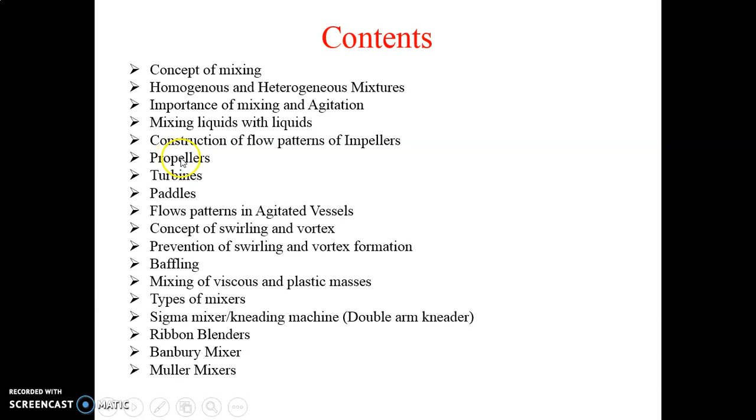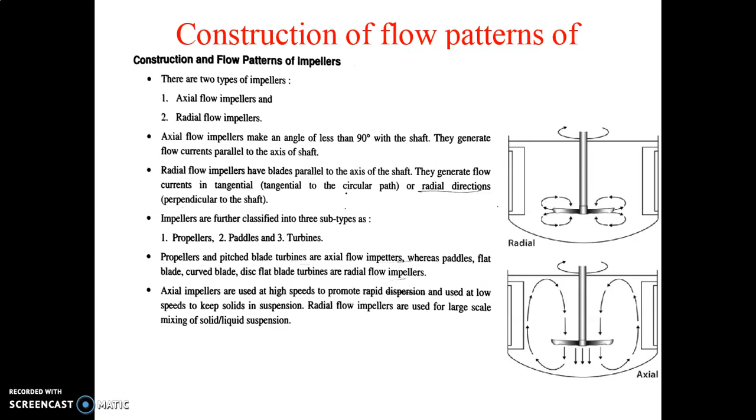That means you don't have to insert the propeller at the center of the tank because there is a vortex formation. That part I will discuss in the next slides.

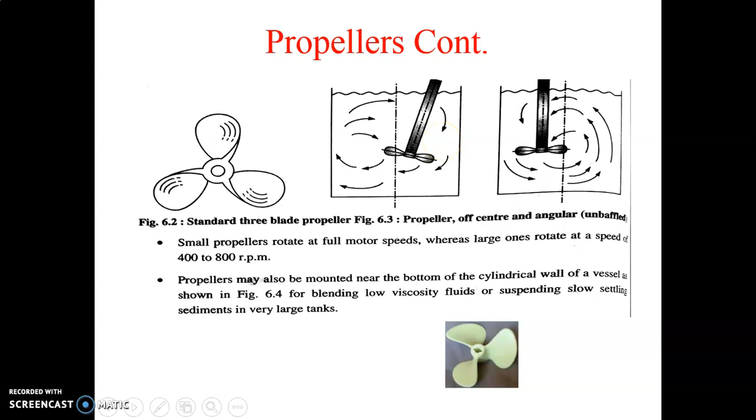So here the propeller may be inserted in the tank from the side, so this is side entering propeller. Instead of off center, we can insert the propeller from any side of the vessel.

And this figure shows the flow pattern of the propeller. The propeller drives the liquid straight down. This liquid is driven down to the bottom of the vessel, and at the bottom of the vessel this liquid stream spreads radially, that means along the radius in all directions, like this.

Then the liquid flows upward to the wall, like this, and finally it returns to the suction of the impeller, this point. So in this way the flow pattern is generated: first the liquid is driven at the bottom of the vessel, then it spreads radially along the wall, and then finally it returns to the suction of the impeller.

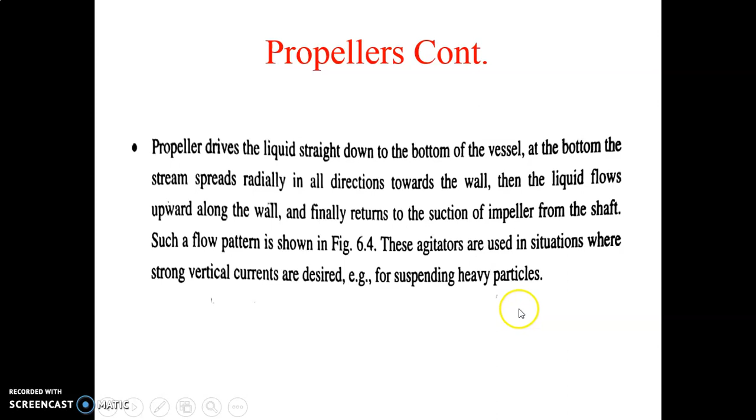So in this way the flow pattern is developed when we are using the propeller in any vessel. This type of agitator, called the propeller, is used for suspending heavy particles. That means if you are mixing a solid material in a liquid, at that time you can use this type of impeller. Next one is the turbine impellers.

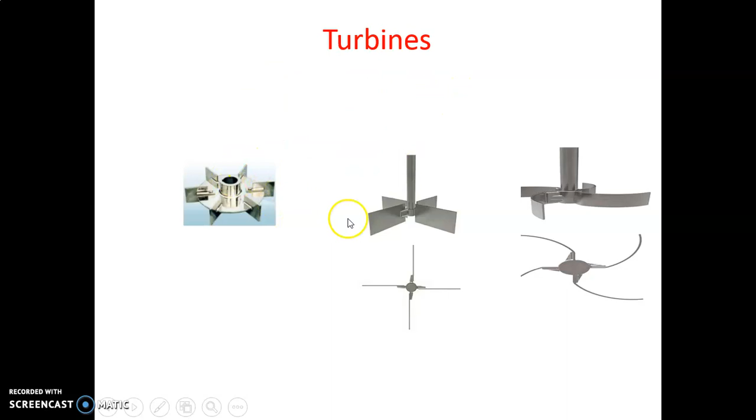Shrouded means there is a cover, this cover is provided along the blade of the impeller. So this is called shrouded. These are the actual photos of some of the turbines.

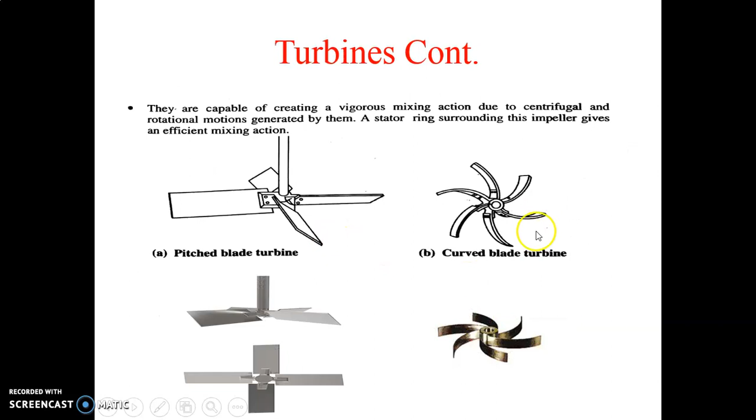And the curve blade, that means the blade which is having curves like this, these types of blades have an angle of 30 to 60 degrees. The speed of these impellers is 50 to 250 revolution per minute. Turbines are used for different liquids having viscosities up to 10 to the power 4 centipoise. Centipoise is nothing but the unit of viscosity.

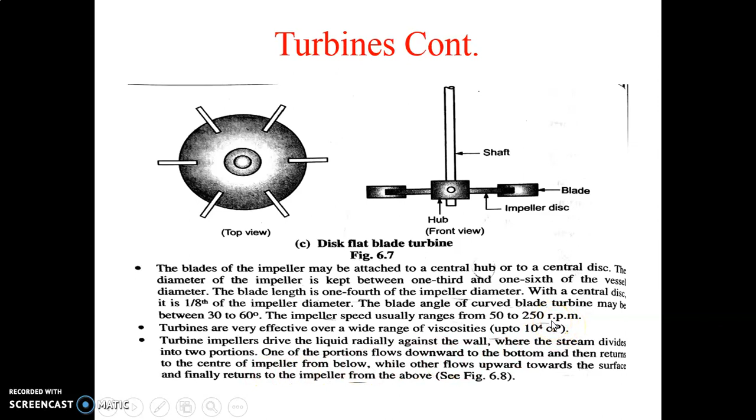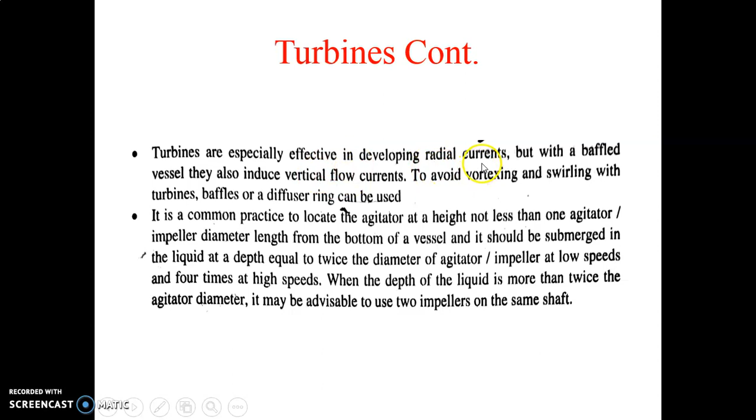So this is the flow pattern developed in an agitator. Generally, turbines develop the radial current. Radial means along the radius.

Next agitator is known as the paddle. Paddles have 2 or 4 flat blades instead of curved ones. There are flat blades, and generally these paddles are vertical, meaning in this direction. I will show the figure, and it is extended close to the vessel wall.

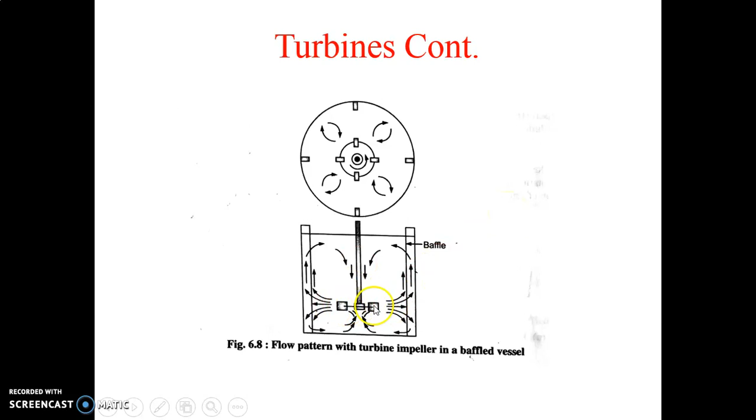These turbines have small diameter, but in case of paddles, the diameter extends up to the wall. They run at a speed of 20 to 150 rpm, and the total length of these impellers is 50 to 80% of the inside diameter of the vessel. The circulation of the paddles is poor, meaning circulation is not sufficient.

There are different types, one sometimes called anchor. If we look at this figure, this is called an anchor. This is a flat paddle, gate, and this is the combination of anchor and gate.

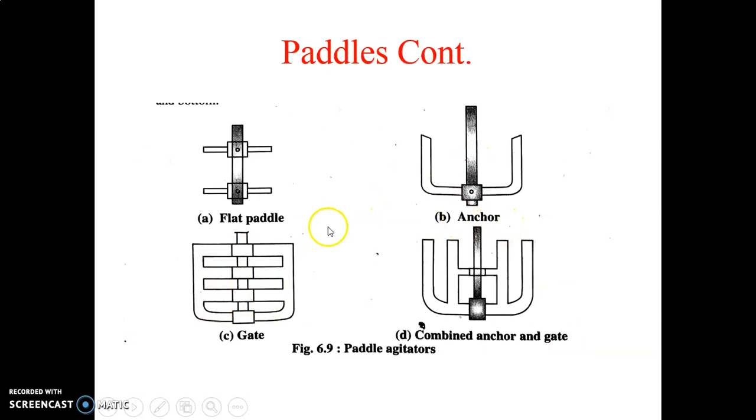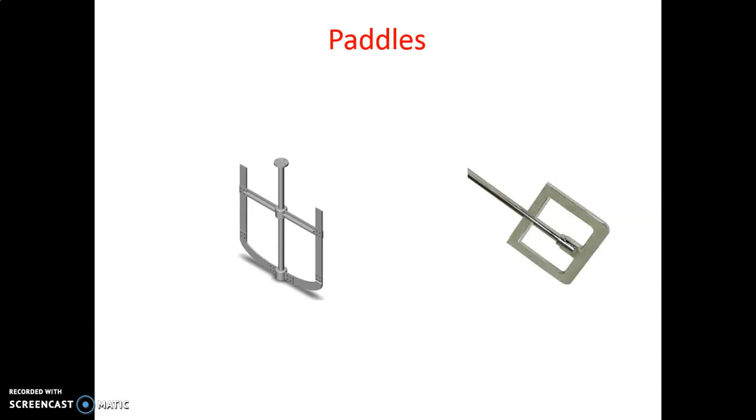So this is nothing but the paddle. If we look at the actual photograph of the paddles, it will look like this - this is an example of a gate. This type of agitator is used just for mixing components, maybe liquid, solid-liquid, or sometimes for highly viscous liquids in chemical reaction engineering. These types of paddles are used there.

Then there is another concept known as vortex. What is meant by vortex? If a low viscosity liquid is stirred, that means agitated in an unbaffled tank - so baffles are not used - and that agitator is centrally mounted, meaning at the center of the vessel.

The lighter fluid, usually air, is drawn in the form of a vortex at the surface of the liquid, and this process is called a vortex. The vortex reduces the degree of agitation or mixing. I will show the actual figure of the vortex.

If we take that impeller and mount it at the center, this type of flow pattern is observed in the tank - that is called a vortex, as shown in figure 6.11. It is a high speed impeller, and the air is drawn from the center of this impeller. This is called a vortex. If the vortex is formed in the agitated vessel, it will reduce the degree of agitation. Then how is vortex formation minimized?

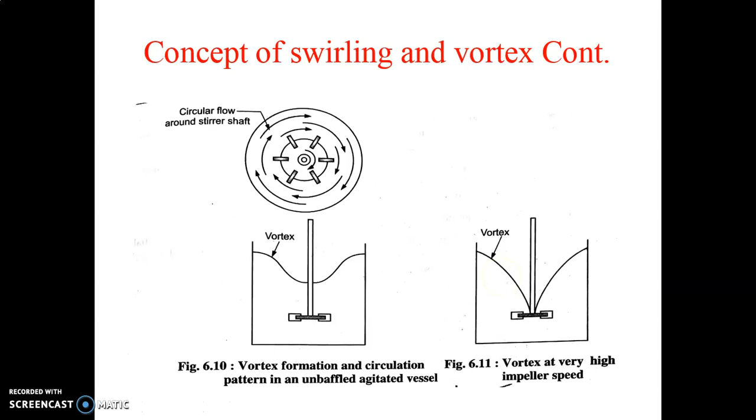There are three methods: off center mounting of the impeller, use of baffles, and use of a diffuser ring with the turbines. First I will discuss the off center method.

What is meant by off center? You have to mount the agitator at the side of the tank, instead of the center. So this is called off center mounting. Or sometimes you can enter this agitator from the side of the vessel, like this. So these are the two ways, methods to prevent vortex formation, since vortex is an undesirable process.

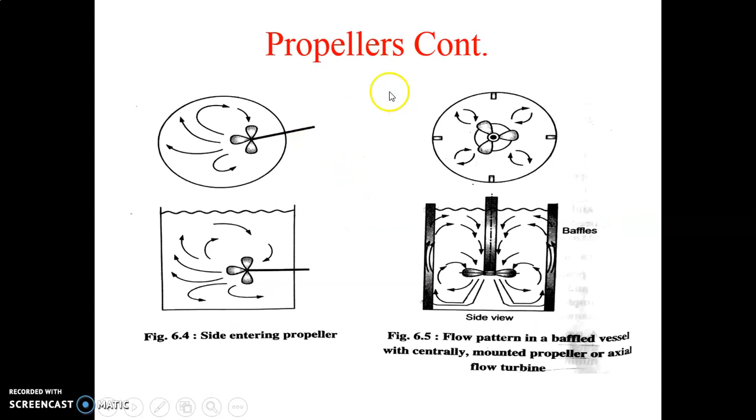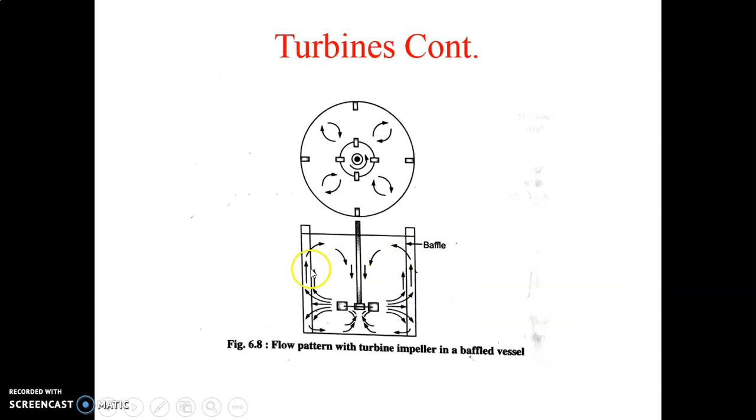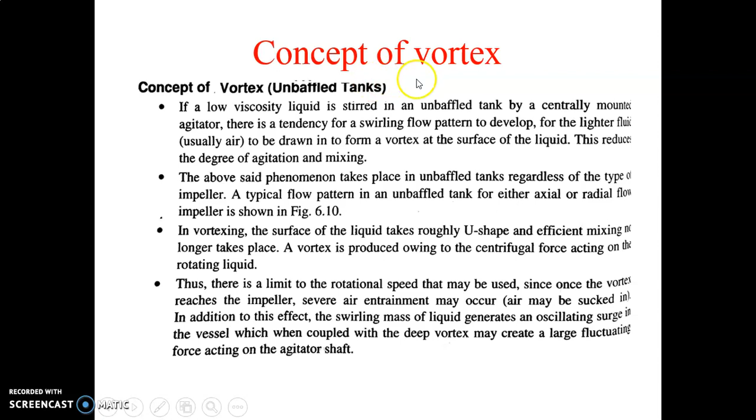The remaining part we will discuss in the next lecture. So today's lecture, I discussed how propellers work and the flow pattern developed by propellers. Then turbines, the different types of turbines, and the flow pattern developed by these turbines. At the end of the lecture, we discussed paddles and saw figures of paddles. Before ending, I discussed the concept of vortex and how vortex is minimized. The remaining part we will discuss in the next lecture.